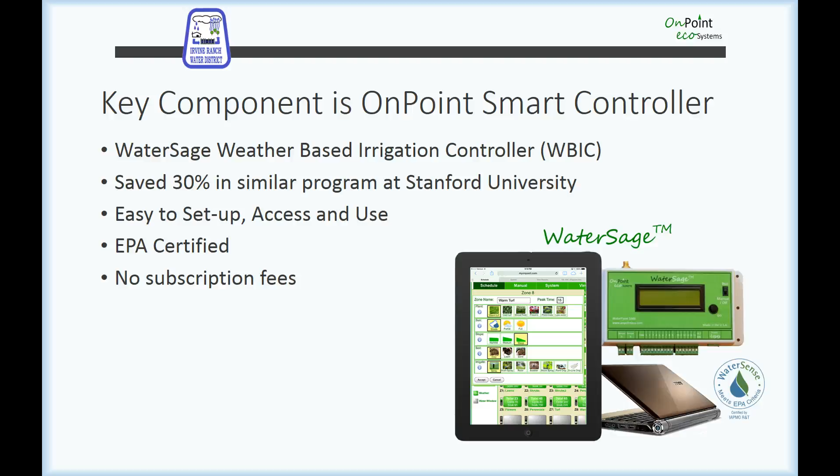Quickly touching on program responsibilities, Irvine Ranch Water District is funding this program and providing oversight. OnPoint is the controller supplier and is managing the program. Professional installation, if selected, is being offered through Imperial Technical Services out of Anaheim.

As far as your responsibilities, we ask that you fix major irrigation issues prior to installing WaterSage, have a good Wi-Fi signal at the controller location, and install the controller within 3 weeks of this workshop. There will also be several brief email surveys over the next 12 months asking for your feedback to help us measure the effectiveness of the program and address any questions you may have.

More information on these topics, including how to determine you have a good Wi-Fi signal and extend it if necessary, can be found at the Get Smart program homepage, qualification form, and frequently asked questions. Feel free to contact us about different Wi-Fi repeater and extender products as well.

Before getting into the specifics of the WaterSage Smart Controller, let's briefly cover the main concepts of efficient irrigation. I think you'll be surprised at how obvious some of the ideas are once you're aware of them.

First, plants use water, and the amount of water they use varies. The key to this variation is ET. No, not that ET, but evapotranspiration.

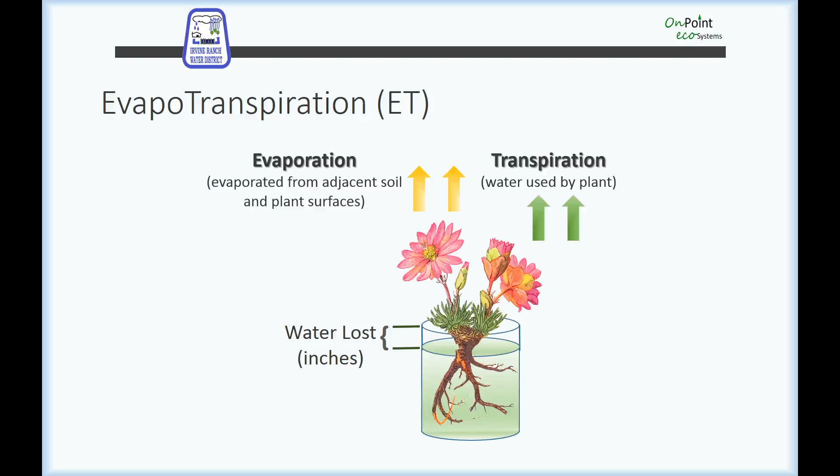Think of your landscape as a plant sitting in a glass of water. Every day, the amount of water in the glass drops due to evaporation from soil and plant surfaces, and transpiration, the water used by the plant. And the ET, or amount of water used by the plant, is constantly changing due to temperature, humidity, wind, and sunlight.

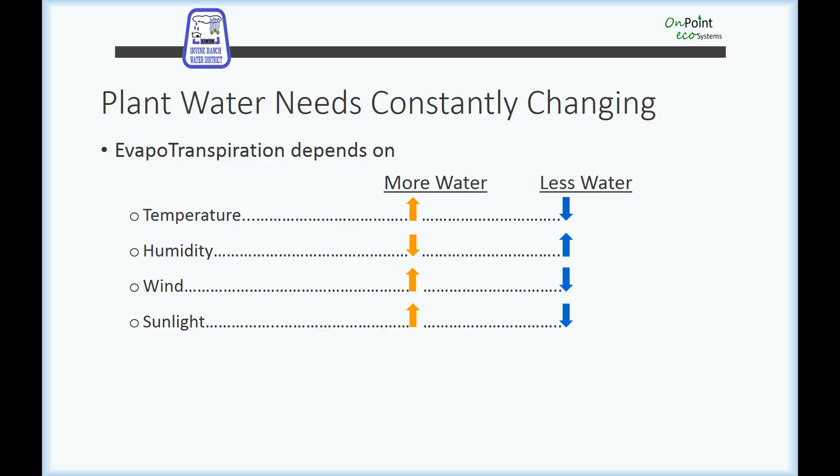One important takeaway is the amount of water needed by a plant varies throughout the year. And to keep plants healthy, the water used needs to be replaced by either irrigation or rainfall. Since it doesn't rain in California for much of the year, irrigation is required.

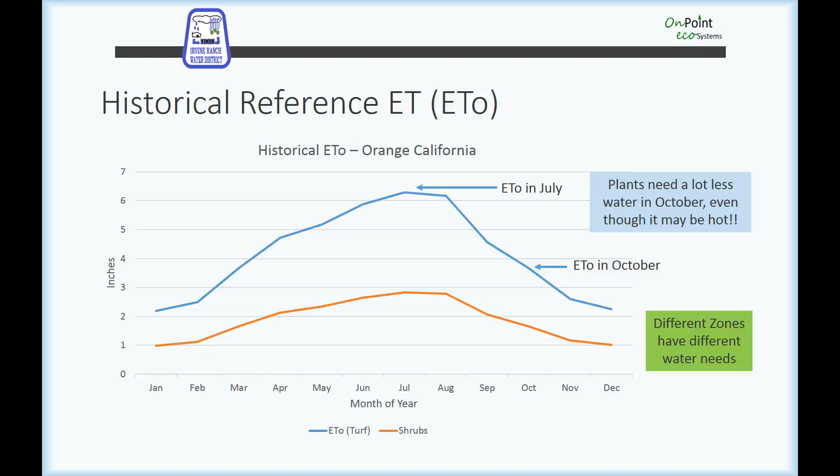Another important takeaway is that this variation in water use is not based on temperature alone. A plant uses significantly more water in July than October, even if both days are hot. Why? Because the amount of sunlight is significantly less in October, and sunlight affects ET.

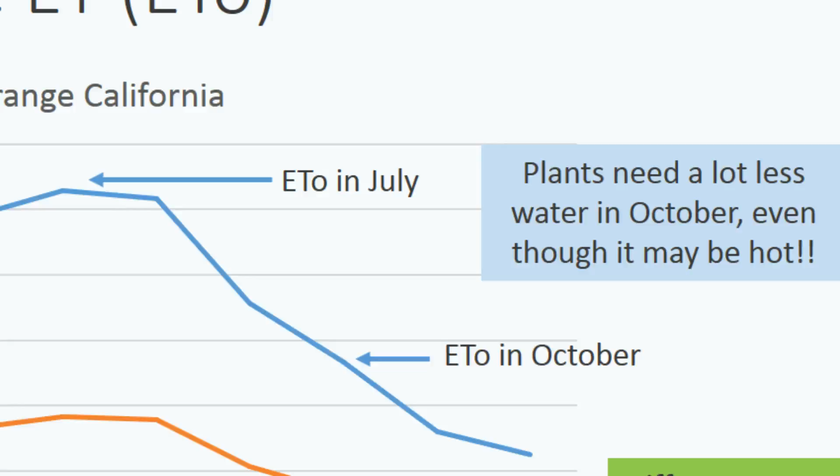The last important takeaway is that not all plants require the same amount of water. As you can see here, if you are applying the same amount of water to the shrubs and lawn, you're wasting water.

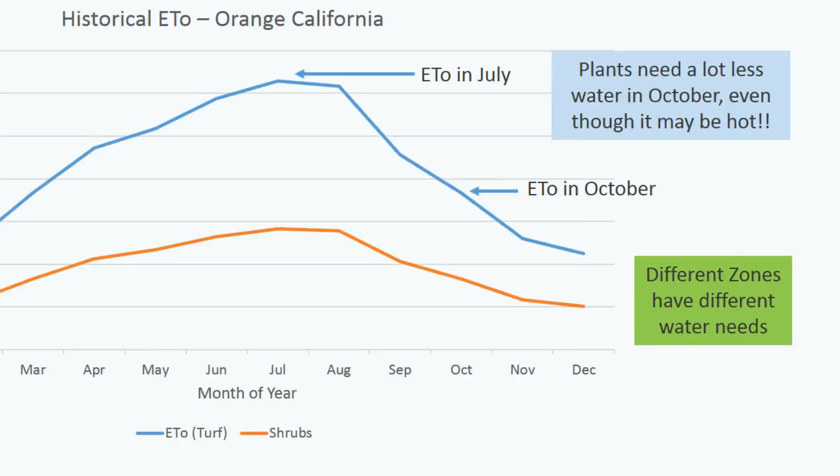Because different plants have different water needs, a well-designed irrigation system divides the landscape into hydrozones, where each irrigation valve, zone or station on your controller, waters plants with similar water needs. The type of irrigation should be consistent across each zone to ensure the same amount of water is applied throughout that zone. For example, all spray nozzles in Zone 1 should have matching flow rates.

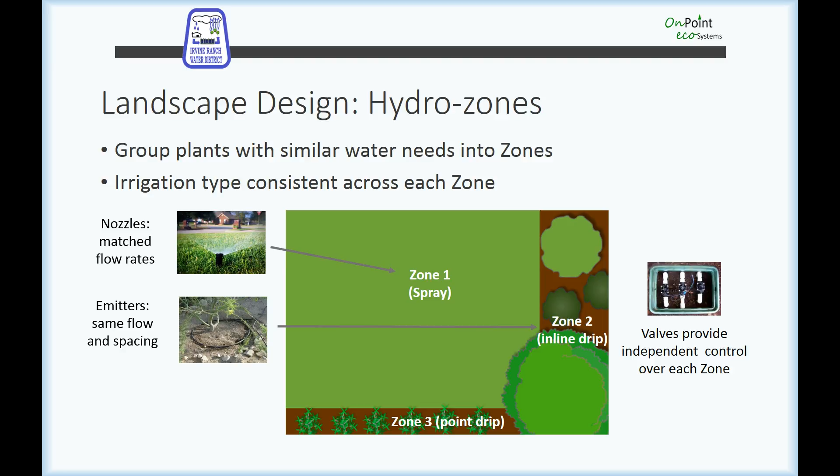The inline drip tubing in Zone 2 should have matching emitters and spacing. And the point drip, where you select the emitter color, should have emitters with the same color or gallons per hour. A controller then turns each valve on and off independently, while a smart weather-based irrigation controller saves significant water by automatically adjusting valve run times daily based on weather and landscape conditions. It saves water even if good hydrozone design is not employed, but not as much.

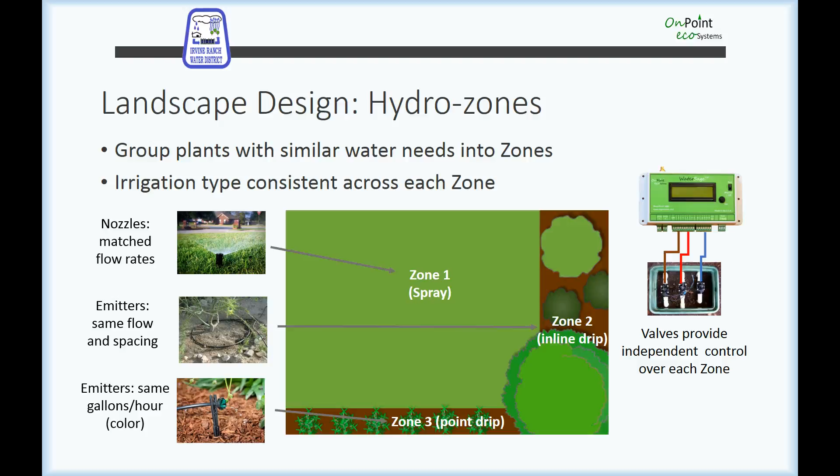WaterSage will help you save water by watering efficiently and helping to avoid runoff. Runoff often occurs because water is being applied faster than soil can absorb it, especially on slopes. Applying water for a shorter period of time and letting it soak in before applying more prevents most runoff situations. This is called cycle and soak, a feature on the WaterSage controller.

There are other things you can do to save water in addition to installing WaterSage. For example, it's a good idea to replace conventional spray nozzles with more efficient multi-spray nozzles. Spray that looks like a mist is an inefficient use of water and can be fixed with pressure regulation.

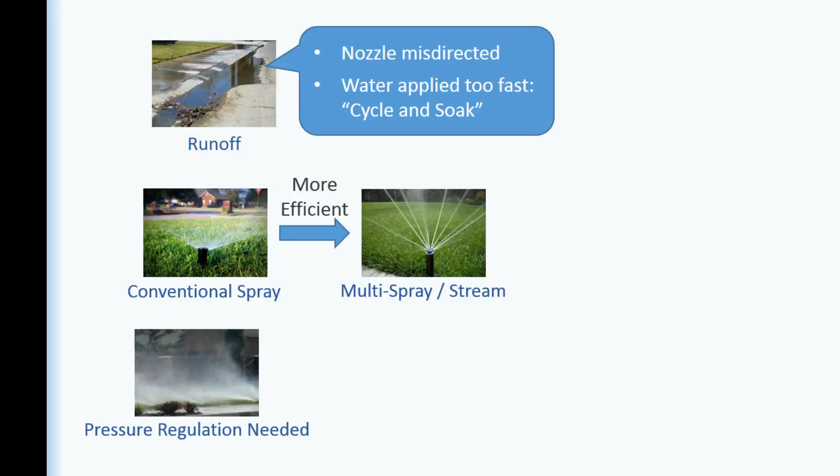You may also notice that nozzles at the bottom of a hill continue to drain after the valve has turned off. This is easily prevented with a check valve at the sprinkler head. Other problems to look out for are broken nozzles and pipes and clogged or missing emitters.

But most of us water early in the morning, too early to notice any issues. With WaterSage, you can easily turn on a valve anytime from your phone while standing next to the zone, making it much more convenient to observe how the system is operating.

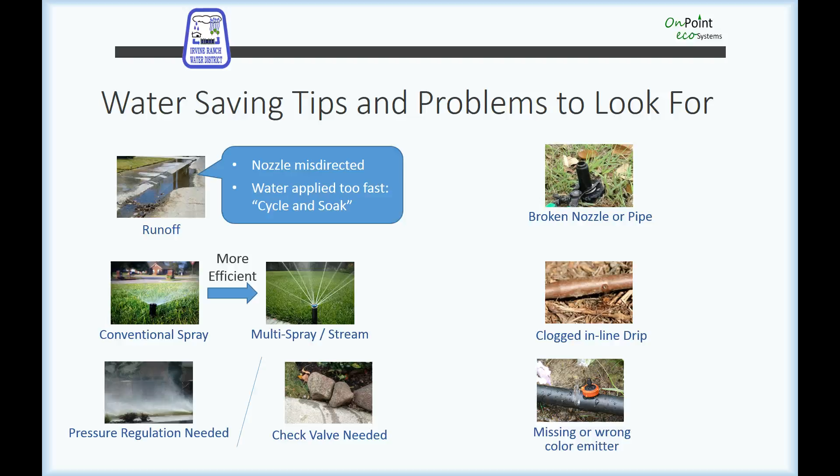Now let's get into how WaterSage, your new weather-based irrigation controller, works and how to use it. WaterSage not only saves water, but makes smart irrigation easy.

The WaterSage solution consists of an irrigation controller and an internet or cloud service called OnPoint. OnPoint collects daily weather from nearby weather stations and calculates an optimized irrigation schedule for each zone every day. OnPoint also allows easy access to the WaterSage controller from virtually anywhere using a smartphone, tablet, or computer.

Before setting up and installing WaterSage, it's a good idea to take a picture of or write down the settings and zone locations of your current controller, as you may want to reference them in the future.

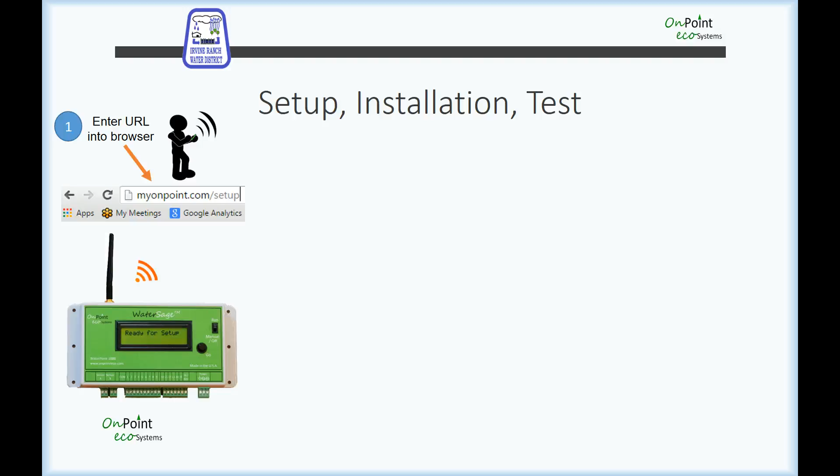To set up WaterSage, first connect it to your Wi-Fi network close to your router, then create an account and enter your zip code. A convenient setup wizard walks you through the process and is accessed on your browser at myonpoint.com/setup. Next, move the controller to the installation location.

Mount it and attach the wires. Alternatively, with the existing controller in place, you can remove the WaterSage connectors, move the wires from your existing controller to the connectors, then remove your existing controller and mount WaterSage. Finally, reattach the connectors, then test each zone to make sure it's operating properly.

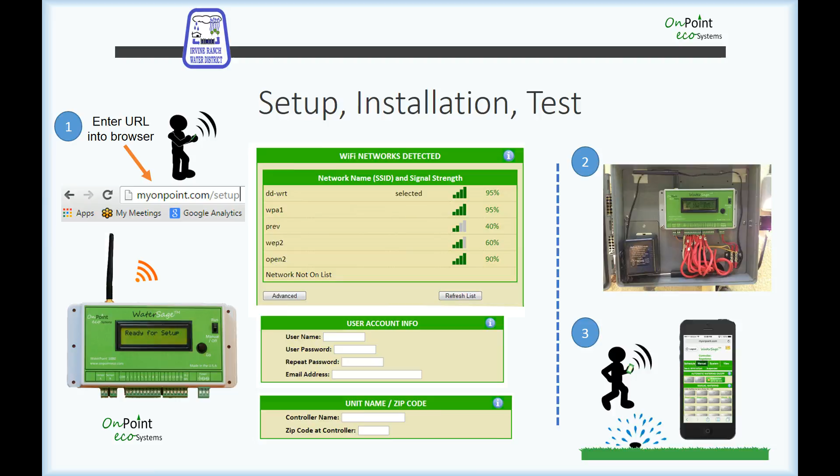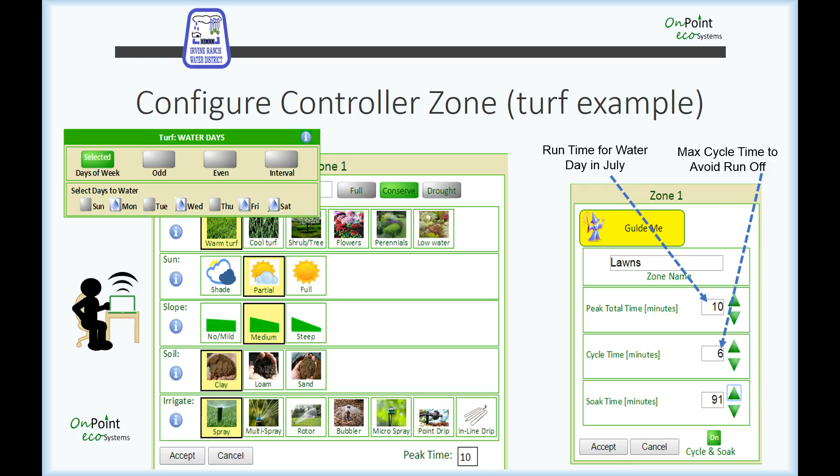After installation, configure WaterSage using the Landscape Wizard. Simply select the pictures for plant, sun, slope, soil, and irrigation most closely matching each zone, and WaterSage recommends the peak total time for that zone and a maximum cycle time to avoid runoff.

In this case, the zone is watering a lawn with partial shade, a bit of a slope, and clay soil. The sprinkler type is spray. Note the words zone, station, and valve are often interchangeable.

The peak total time is for reference purposes and represents a typical water day in July, but actual watering will vary depending on weather and time of year. The cycle time is the maximum continuous time a zone can run before pausing to let the water soak in, and the soak time is the time that zone must wait before running another cycle.

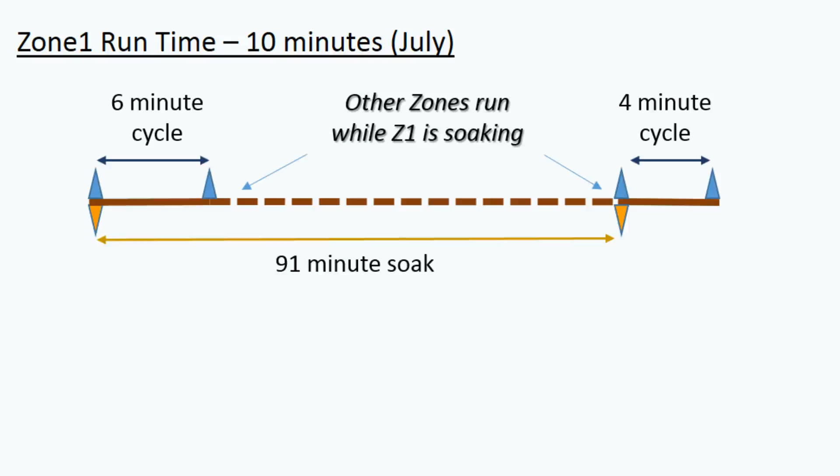In this example, on a typical summer water day, Zone 1 needs to run for a total of 10 minutes. With cycle and soak, the controller stops the zone after 6 minutes, the maximum cycle time, waits 91 minutes for the water to soak in, then completes the run time in a second cycle of 4 minutes. Note, other zones will run during the Zone 1 soak time to minimize the time it takes to complete the schedule.

In October, Zone 1 needs less water, and the run time of 6 minutes fits within one cycle. Therefore, no soak time is needed.

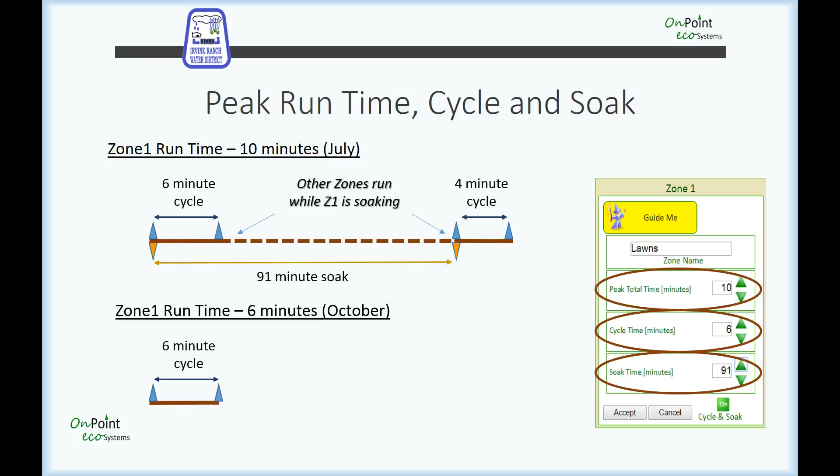When first setting up WaterSage, it's a good idea to compare the summer settings on your current controller to the peak total time. If there's a significant difference, adjust the peak time to a value closer to your existing controller's, and then reduce it in small increments while ensuring the landscape continues to look healthy. Alternatively, keep the wizard recommended time and monitor landscape health, adjusting the peak time up or down as needed.

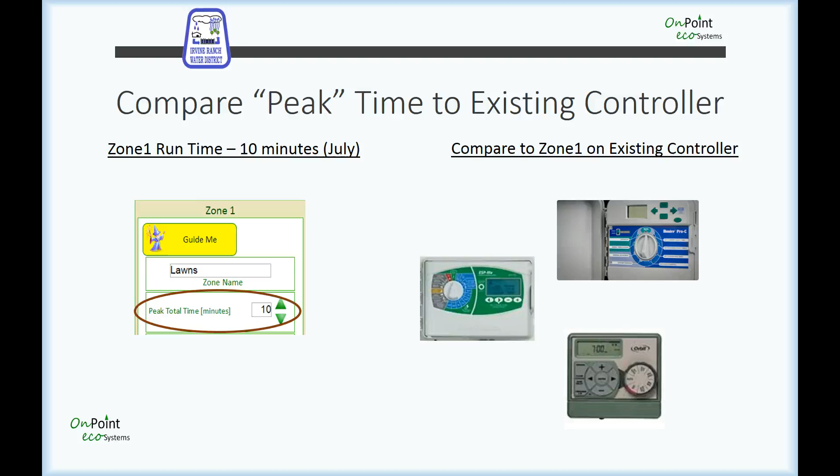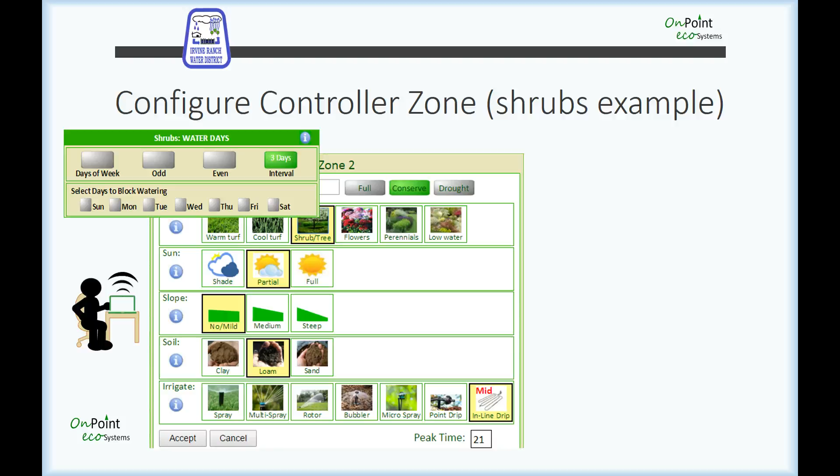Looking at another example, shrubs instead of lawn, again simply select the pictures most closely matching the zone, and WaterSage once again recommends the peak runtime. In this case, the drip line is applying water slow enough so there is no runoff, and cycle and soak is turned off.

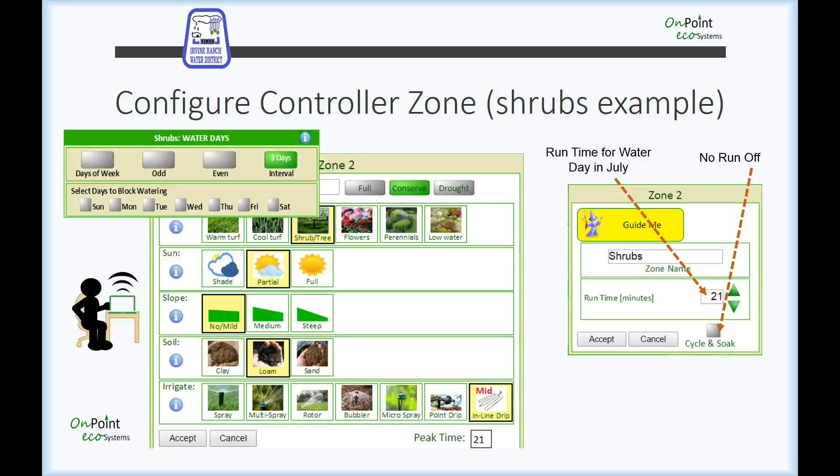Once programmed, WaterSage will automatically adjust irrigation on a daily basis. Let's take a closer look at how it does this. First, the zone information we just programmed is used to define a plant root zone. Think of it as a glass with a plant in it. The glass represents the water holding capacity of the root zone, and the moisture balance, how much water is needed to fill the glass.

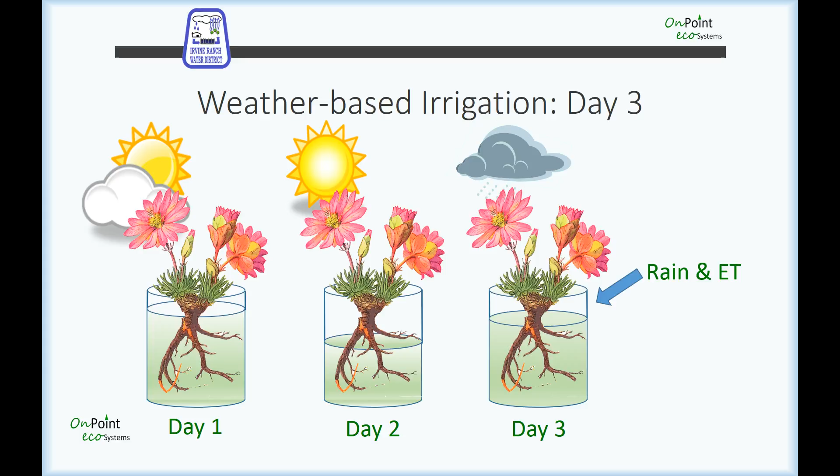Looking at day 1 of an irrigation schedule that waters every 3 days, water is applied by irrigation to fill the root zone. Day 1 also sees the plant using water through evapotranspiration. The plant uses more water on day 2, and the root zone is further depleted. Although the plant uses water on day 3, rainfall exceeds evapotranspiration, increasing water in the root zone. Day 4 is the next water day, and WaterSage applies only the amount of water needed to refill the root zone.

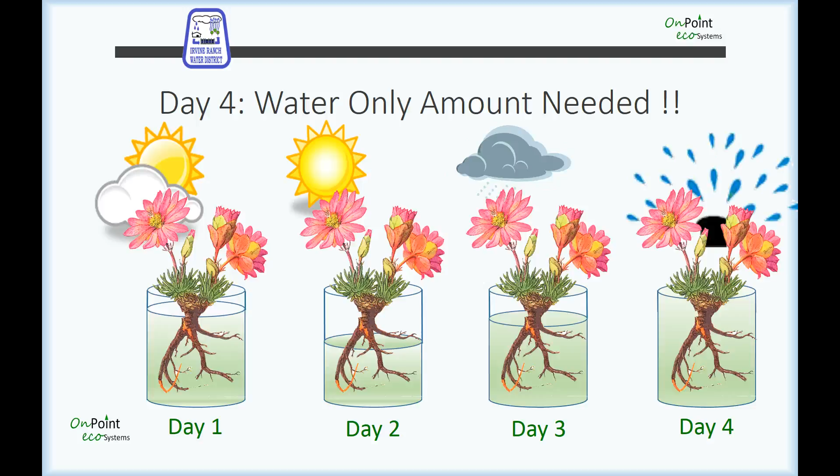So what will WaterSage do on a typical July water day? At the beginning of the day, my OnPoint gets weather information and determines the total ET, or water loss, since the last water day, and notes there has been no precipitation. The ET of 0.6 inches, along with the landscape settings for each zone, are used to create an optimized irrigation schedule for all zones, including cycle and soak times. Because it's a typical July water day, WaterSage runs each zone the peak runtime.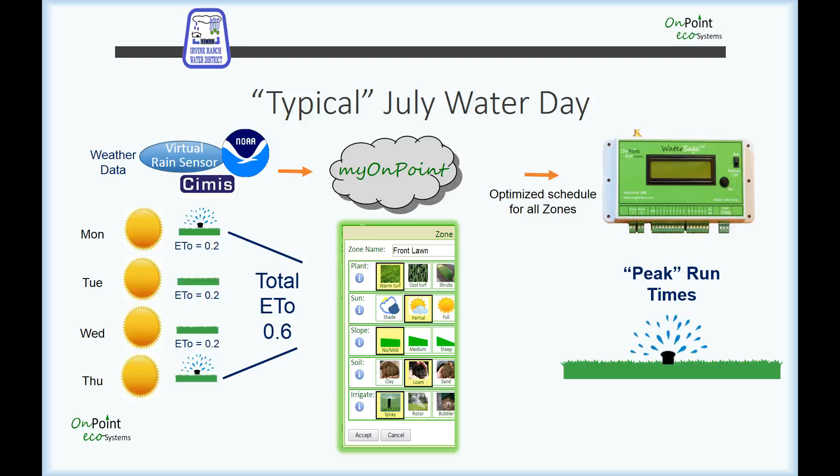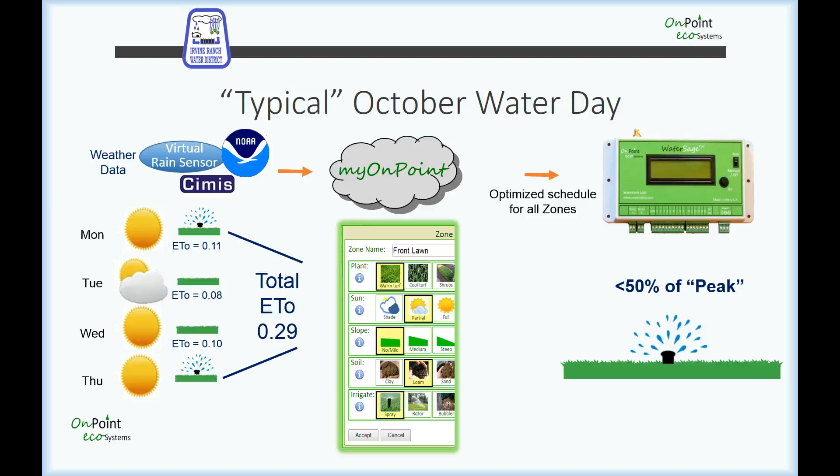Now on this October water day, WaterSage goes through the same process, getting the ET and precipitation information. Then along with the landscape settings, it computes an optimized irrigation schedule. Even though it was sunny and hot since the last water day, ET in October is significantly less than July, and WaterSage waters less than half of the peak or July run times. WaterSage is making these adjustments automatically every day.

And it's easy to use. Turn valves on and off manually from the convenience of your smartphone, run diagnostic tests to isolate wiring and valve issues, and on-screen help is available for any function.

If you want to know more about what WaterSage has done and is planning to do, dig into the numerous reports on events, water use, both historical and forecasted, details on today's irrigation plan, and current root zone depletion levels. The water use report is also handy to check planned water times for the upcoming 2 weeks after initial setup or a zone configuration change.

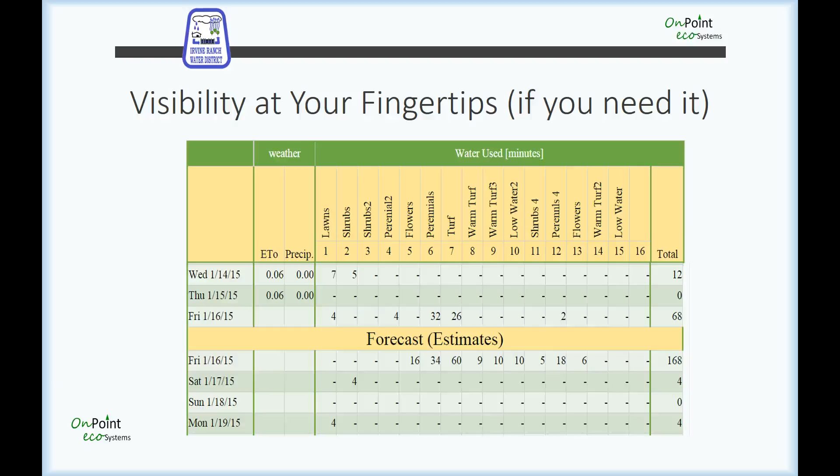You will receive the following items in the WaterSage box: the controller, antenna, and power adapter, mounting screws and wall anchors for mounting to drywall, a screwdriver to secure the valve wires to the connector. The wire and wire cap are used when there is more than one common wire to connect to the controller. Simply twist the common wires with the included common extension wire, secure with the wire cap, and insert the other end of the extension wire into position 1 on the large connector.

Valve wires are connected to the other connector positions, and the power adapter plugs into the far right empty connector location. The sensor positions on the left of the controller are not used.

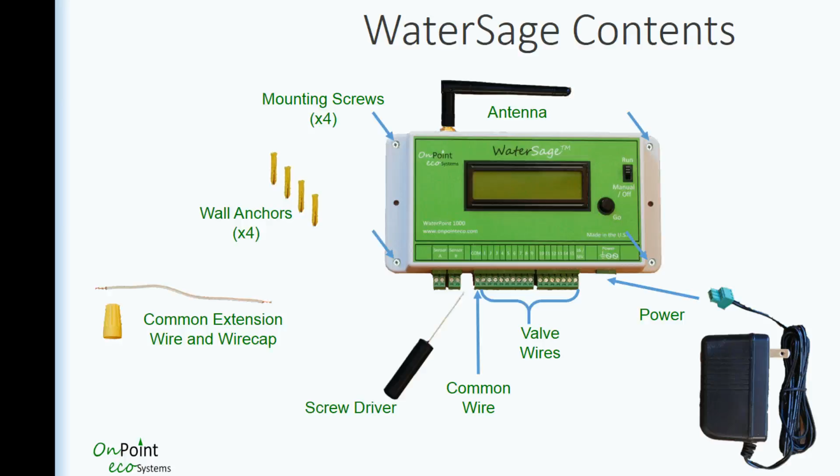Even though the sensor positions are unused, several rain sensors are located throughout the Orange Park Acres community, and a signal will be sent to your controller to stop watering if it's raining. To enable this function, be sure to turn on the sensor from the web interface of the controller and set the rain sensor delay to 0 hours.

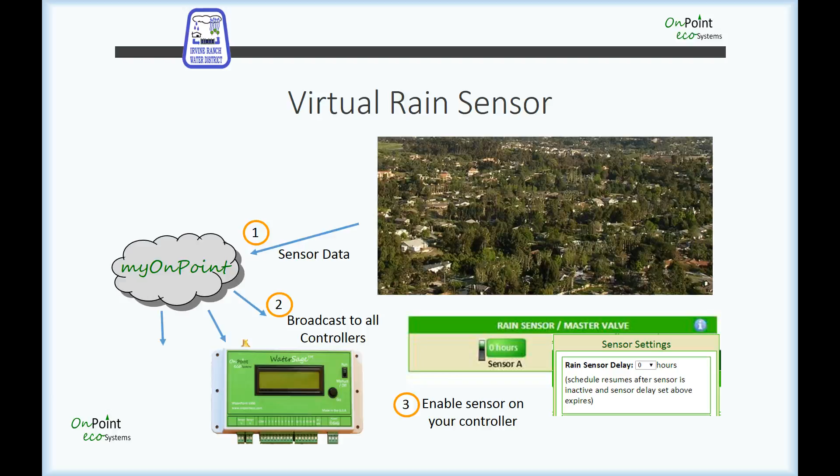As far as installation alternatives go, you can elect the do-it-yourself option, where you or your landscape professional will install and set up the controller, or for an additional charge, select Professional Installation from Imperial Technical Services. Details about what is included with professional installation are provided on the Get Smart homepage.